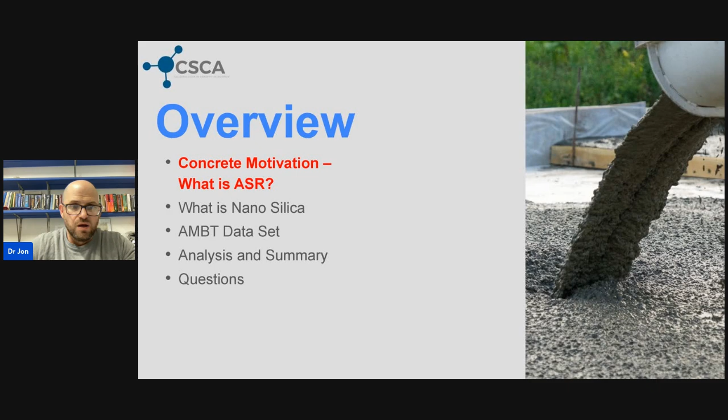For my nanosilica enthusiasts, or for my ASR enthusiasts, please forgive me as I take some artistic liberty with explaining this in a very short, concise set of time here in slides.

Our concrete national infrastructure is made up of over 600,000 concrete bridges. This establishes a $48 billion a year industry. Of that, $8.3 billion is put back into maintenance associated with physical and chemical attack. Now, I'm not saying that concrete is broken, but we do need to figure out a way to enhance the durability.

If you're of the mindset that, well Jon, that's fine, but we're talking about concrete that's 20, 30 years old, who cares, we've changed mix designs - you're not wrong. We need to address the problems from concrete 20 years ago, concrete from 2005, which is not that long ago, especially since concrete bridges at that point were designed for 100 years. As it turns out, there are many bridges throughout the Western US, Midwest US, that are at 25 years old out of 100 years.

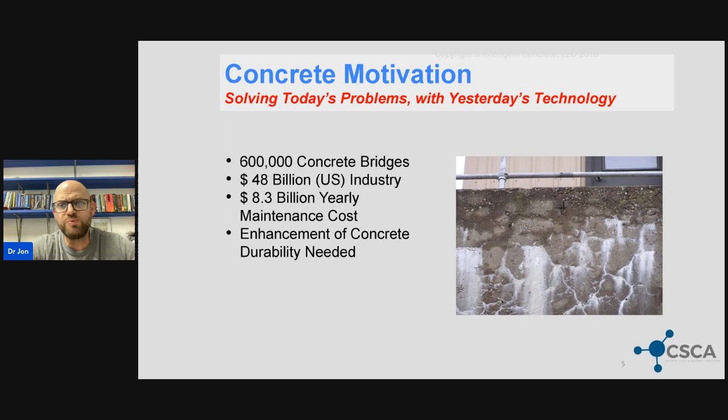And they look like this - a water reclamation project here that has some beautiful map cracking and just some gel oozing out of it. This isn't a surprise to us. We should have seen this coming as concrete producers, as contractors, as engineers. We don't even have to be that involved in the industry - I work for a living and I'm not in the academic arena, so I don't go to these associations. That isn't an excuse anymore with the World Wide Web.

Just Intelligent Concrete and their employees alone, we have somewhere around 100,000 folks who get to see what we share every day for the last few years. And part of that is the herpes of concrete, or alkali silica reaction.

Again, we've seen the changes: the use of higher alkali cements in the late 90s through the early 2000s, all the way to the 2010s. Then through the 2010s and maybe the early 2020s, the use of lower alkali or lower quality reactive aggregates. And the unfortunate reality, it's been buttoned up with ineffective pozzolans. Now, some would say that since we're dealing with these problems, there are cements and low carbon concrete methods introducing a cacophony of errors that we have yet to deal with. I wouldn't argue that.

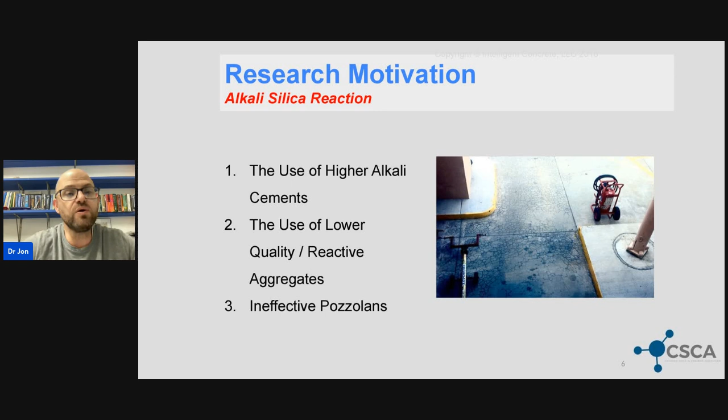But let's get into ASR.

ASR - somebody who deals with this on a very high level, ASTM wise, once said that ASR is not and will never be the primary failure mechanism for a concrete structure. Remember, he made me take it out of my paper. It was funny enough, three months later, he used the same kind of statement: that ASR, for the first time ever, is that primary failure mechanism.

So if you've never seen ASR, what we've got here is a reactive aggregate, and normally that aggregate has a tetrahedral form of silica that is susceptible to a breakdown because of a change in pH at the interfacial zone between the hydrated cement paste and that reactive aggregate.

Now, within that hydrated cement paste, there is a wide variety of salts within water, and we call that a pore water solution. It happens that the alkalis within that pore water solution - sodium, potassium, as well as calcium - break down the reactive silica and redistribute, reorganizing it from monomers to dimers and oligomers in a polymer into this hydrogel that has an expansive nature at that interfacial zone between the hydrated cement matrix and our aggregate interface.

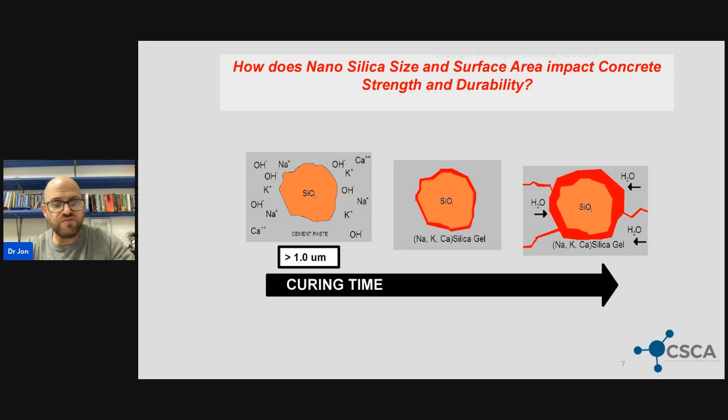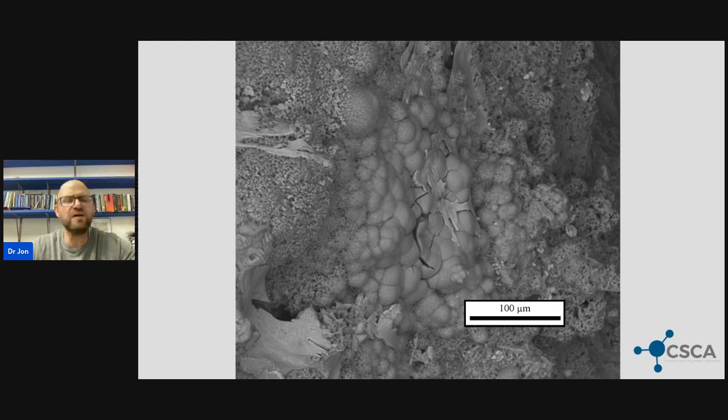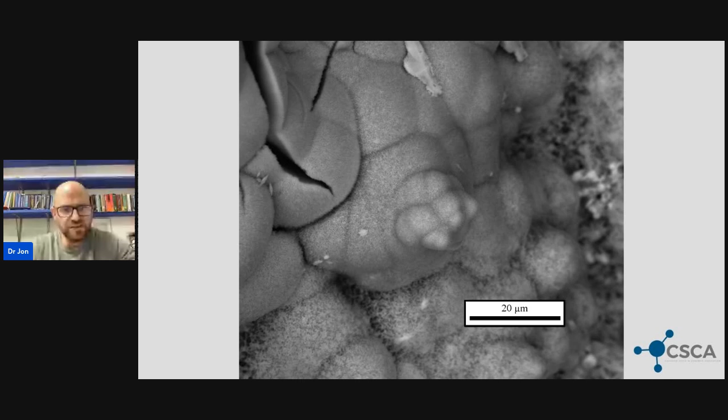Uh-oh, I'm going to kill my camera. We're having video problems here. Hold on, let me see.

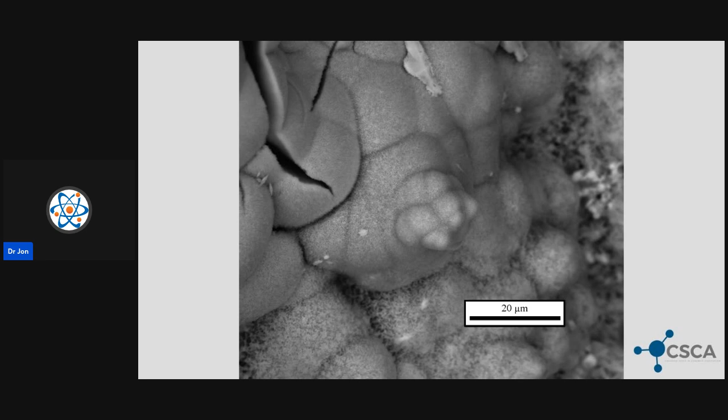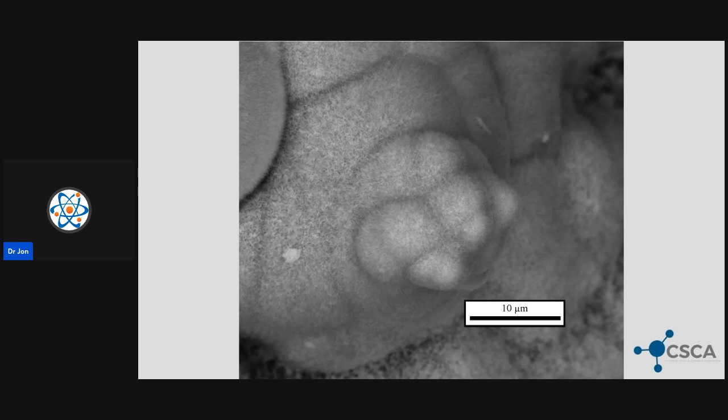Okay, so this is a higher magnification of that ASR gel rosette, and you can see I'm trying to focus on those little nodules there at the center. As I get closer, and hopefully the image isn't lagging, you can almost see some of the individual fibril morphologies - these wispy, needle-like structures that are interlocking.

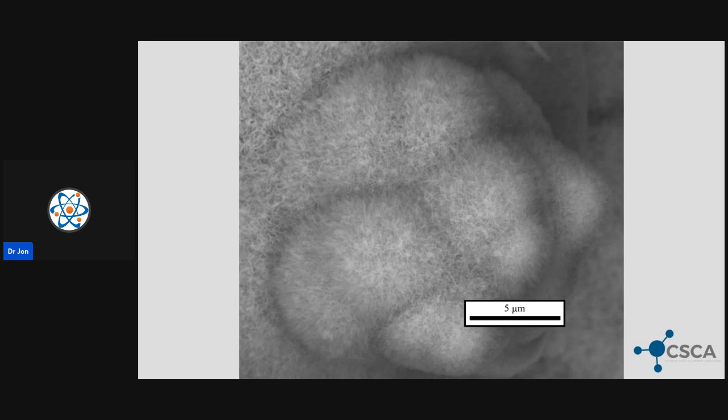We're going to get a little bit closer, but this is the mechanism behind the ASR gel drawing in more water, having the ability not only to survive in that hydrogel-like state but also thrive, going from a mature to a new or immature gel state, which again is often contained within a shell that is then confined, creating more stress. I think that's the highest zoom I have on this. It's just so gosh darn pretty to look at.

And if you've never read her paper - Kim Kurtis, back in 1996, and I brag about this paper way too much - she did a paper on soft X-ray gel spectroscopy, microscopy... I can't remember the last word she used, but basically what she was looking at is this fibril-like morphology of the ASR gel rosette.

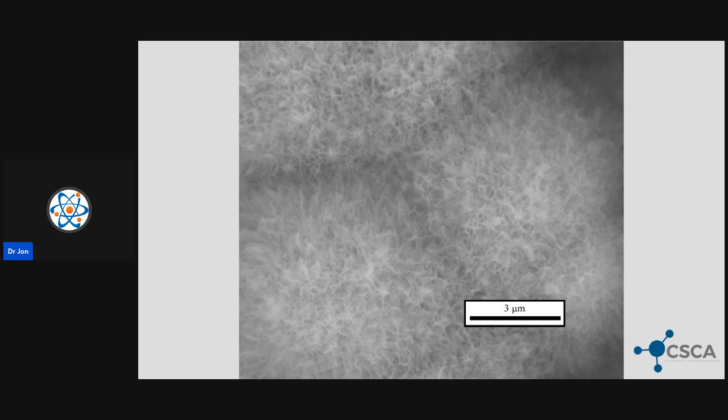And why that's important is because we have these needle-like fibers or fibrils crossing over each other, creating pores with extremely large and then small diameters all the way through it. What that does is create a capillary suction that draws in not only the pore water solution but the salts, which will induce more expansion.

Now again, I want to remind everybody, this wasn't a surprise to us that this ASR issue was not only going to be an ongoing problem, but it was going to get worse. Those three things I brought up earlier - those weren't my words, and I'm not trying to plagiarize. Here's a great recommendation for you to read.

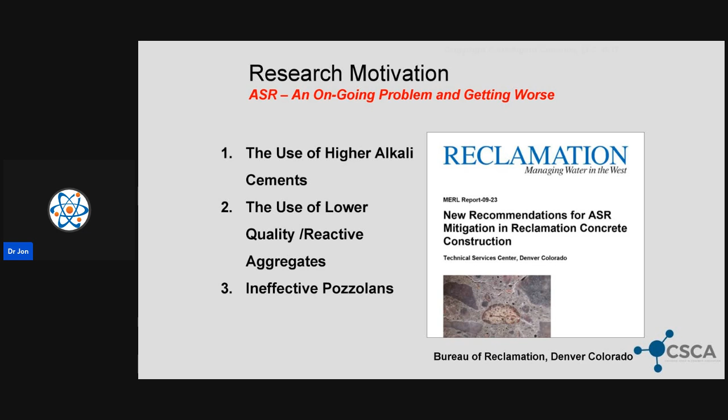This is by Katie Bartojay, Kurt Von Fay, and a couple other folks at the Bureau of Reclamation in Denver, at the Denver Federal Center. They came up with a great paper on new recommendations for ASR mitigation, and they cite the three reasons why ASR was going to get so much worse. It's literally in the front of the document - you don't have to go sixty pages to the conclusion to find out what's going on. So we knew about this.

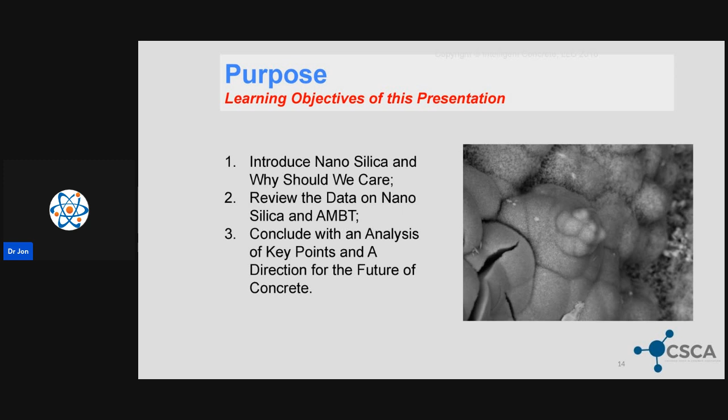Now that I've created the doom and gloom, the objectives of this next part: I want to introduce what nanosilica is. I want to go into why we should care about using nanosilica as a tool in our ASR mitigation box. And then from there, we're going to review the data, not only the AMBT, but also this ASR gel pat test that we did. And then we're going to wrap it up with a concise summary, analyzing the key points and the direction for the future. And then, of course, we're going to open up for any questions.

Okay, let me see. Do we have any comments, questions? Did you see any, Whit? No, I don't think so. All right, come on, y'all. Start coming up with good questions. I got a bunch of T-shirts over here. I don't have a bunch of T-shirts. We have a few T-shirts.

Okay, so what is nanosilica? I think I might have uploaded the wrong presentation. We're going to find out here in a second. Let me see. Yeah, we'll see here in a second if I have to change over. Man, oh, shut it. Yeah, hopefully this is not the wrong one.

Okay, so nanosilica is a liquid dispersion of nanosilica-sized particles, not affected by gravity, clear to milky appearance. The specific surface area is anywhere between 30 to 2,700 meters squared per gram. Solid content can be anywhere between 15 and 50%, and your pH has a maximum of 10.7.

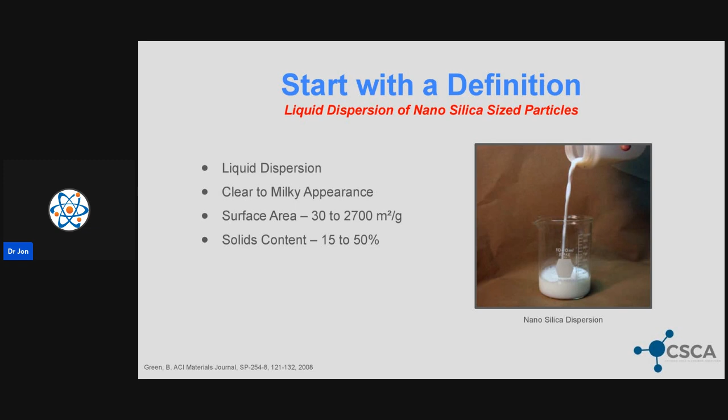Now, thank you, Brian Green and his crew from their paper on ultrafine amorphous colloidal silica for a rock matching grout. And this is a colloidal silica or nanosilica dispersion. And just a quick concrete hack for you. The larger the particle, the more opaque or milk-like the colloidal silica dispersion. The smaller the particle, the more it looks like water or water with a blue and greenish tint to it.

Now, when we put this technology under a microscope, I like to set up these references to give you all an idea of what we're dealing with here. Just to give you a reference, a human hair, obviously not on my head, is around 100,000 nanometers in diameter. For my concrete folk, left-hand side, our fly ash that we traditionally use, that poor man's water reducer, pozzolanic reaction, when we put it under an electron microscope, we'll see it somewhere between 1 micrometer and 100 micrometers. Here we see it around 10 to 20 micrometers in diameter.

Using a similar, not the same, electron microscope, when we look at nanosilica, it's around 10 to 20 nanometers, effectively 1,000 times smaller than our fly ash. And because it's smaller, we're going to have some different positive benefits that we can take advantage of, not only for other value-added performance like abrasion resistance, permeability, but also alkali silica reactivity.

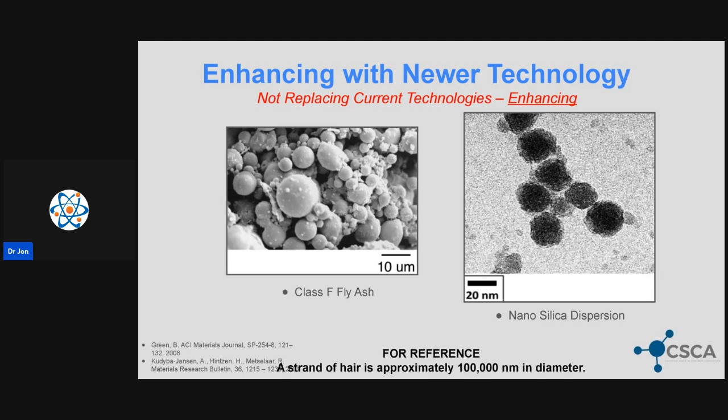Now, what's so special about nanosilica? First of all, with nanosilica we have this free silica surface area for pozzolanic reaction. I often refer to the team, Land and Stephan, who wrote a paper back in 2012 that talks about this instantaneous pozzolanic reaction that they refer to as the calcium silicate hydrate seeding effect.

Now, because you have that accelerated consumption of calcium hydroxide to develop more of that strength-bearing structure of concrete, that calcium silicate hydrate, you have a higher degree of cement dissolution. We call that accelerated cement dissolution. Two great papers, Bjornstrom et al., back in 2003 and 2004. What that basically means is we're getting a higher dissolution rate. We're getting more bang out of one cement particle compared to what we would without that nanosilica technology.

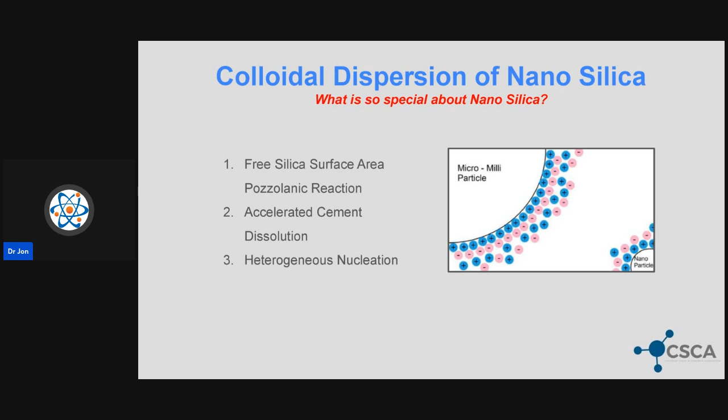And the last piece, what makes nanosilica different from other particles in the micron realm, is something called heterogeneous nucleation, which is a very fancy way of saying, because we have a very small particle, it has a very small force field on it, and therefore other things will want to grow on that particle because of said smaller force field or electrical double layer. And I illustrate that here with my micrometer-sized particle versus the nanometer-sized particle on the right. Those change in force field.

Okay, so let me just check the, what's it called? Let me see. I really hope I didn't screw that up. Oh no, I think I did, Whitney. Everybody, I might have to change slides here in a second. Maybe not. We'll see. If not, it'll be a quick change. Okay, comments. What comments do we have?

Does nanosilica increase abrasion resistance in concrete? Yes, Sri Harsha. Let me show the questions. Yes, we've been seeing that for a long time now. But again, if you do a quick Google Scholar search, or if you're part of the ASTM, I think it's C09.24, our committee to make an ASTM for colloidal silica in concrete, then you'll see some of the different references that go back to abrasion resistance.

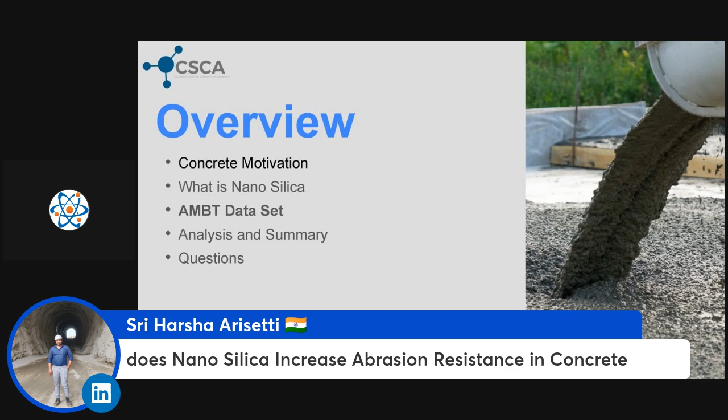Are there any health issues for inhaling silica dust? Yes, but Yosef, we're not talking about silica dust here. That's a topic for a different conversation. The Silica Fume Association does a very good job of talking about silica dust, but this is not dust. This is colloidal silica or nanosilica sized particles in a liquid dispersion. And when it dries, it agglomerates into big chunks that don't plume into the air.

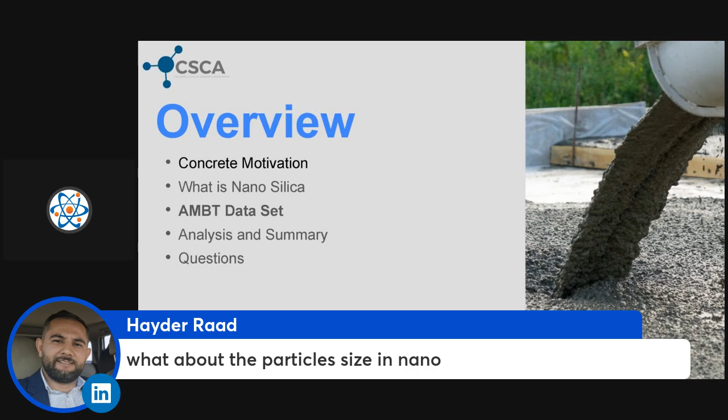And that's Yosef's question. And then, what about the particle size in nanosilica? We're going to get to that here in a little bit, Hayder.

Ranit: I did trials with nanosilica 0.3% with 2 different cementitious materials but did not get significant strength gain. I've also observed shrinkage cracks after hardening. It sounds like, Ranit, you need to use a different type of nanosilica. If you didn't see any type of strength gain, especially early strength gain, you might have been using too small of a nanoparticle size, like a 3 to 5 nanometer, especially if you have observed shrinkage cracks after hardening.

We can get into what better types of nanosilica there are out there for it, but basically you want to go for a larger particle size, ultimately to control that hydration. But I would need a lot more information, Ranit.

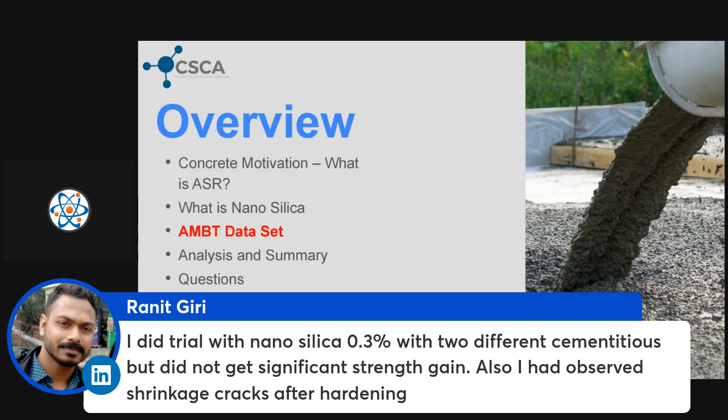All right, so mortar bar design. Oh gosh, is that number right? I think this is the wrong presentation. So if I screwed that number up on the 20%, I apologize. It looks like I screwed that up. Sorry. It's supposed to be the opposite. It's supposed to be 990 on aggregate and 440 on cement, and I switched those two. I apologize profusely. That was not intentional, but you get the idea.

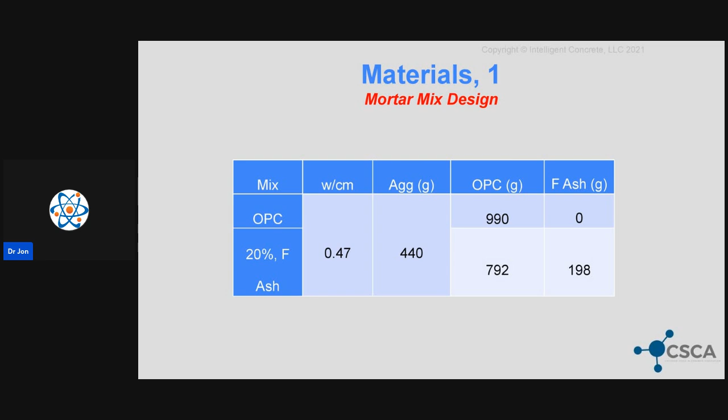Here's our colloidal silica packages that we used. We used 3 different types. They were narrow distributions, 3 to 5 nanometer, 9 to 11, and 45 to 47, to give us those 3 different specific surface areas.

Is it cutting off the bottom? I don't think so. Can you see dose 4? I cannot see. Mine is showing the overview slide right now. I don't know why. Let me refresh. Hold on, folks. Okay, I'll keep going, assuming that we're doing all right here. Yeah, I can't see those. You know what? Why don't you shut yours down? Maybe you're drawing on some of the internet for this.

So what we've got here is 3 discrete or narrow distributions, and I used them at 4 different dosages, where the first dosage represented an equivalent amount of silica that would be brought by 20% class F fly ash. Then we increased it by 1 order of magnitude, to 200% fly ash, and then 2,000, and then 4,000% equivalent. We couldn't replicate that using class F fly ash in our mixes, so we stuck with that 20%, but we used colloidal silica with the same specific surface area of reactive silica as the class F fly ash, and then those increased dosages.

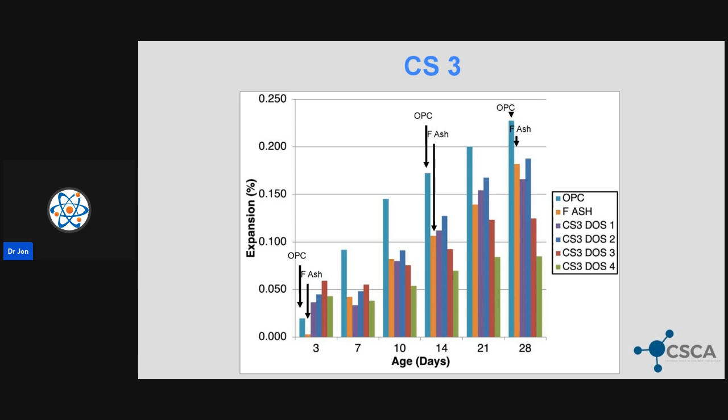Okay, you might have been using too much. You might not have been using enough. You might have been using a cement that doesn't work well with nano silica or colloidal silica, and it could agglomerate as soon as you distributed it into the mix. You might not have mixed it fast enough. There might have been a mid-range water reducer in your mix, and so on and so forth. So just because it didn't work once doesn't mean it'll never work. Just means you need a better combination of colloidal silica to your binder and admixture matrix.

Okay, so let's get back to how does the ASR work, and how does the nanosilica size and surface area impact it? And like I said, we have these much smaller particles. Every single dispersion that we're using is very discrete. So we know that there are certain mechanisms that are happening with the smallest ones that are not happening with the largest ones, and vice versa.

And as it turns out, with the smallest particles, and you can go back to a lot of the research, not only the research that we've done, but a lot of folks from other universities from all over the world that show that those particles that are really, really small have a tendency of burning up faster and getting lost in the hydrated product. And we have to question whether or not it's nanosilica anymore, or is it now chemically incorporated into the calcium silicate hydrate network. Now, what's great about that stuff is it has an immediate interaction with the pore water solution, doing something that would otherwise cause ASR expansion.

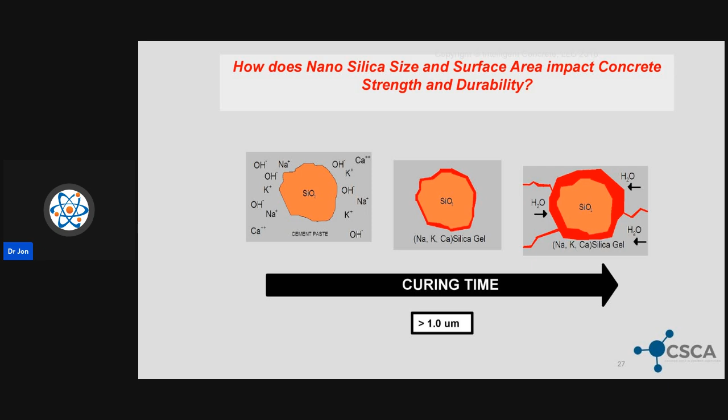And there's some wonderful papers that I've been reading on the role of portlandite or calcium hydroxide, the need for that for the ASR gel expansion to really kick off. Now, with our larger particles, they might not kick off that pozzolanic reaction as quickly, but what we found with those larger particles, 9 to 11, 45 to 47, even up to the 100 nanometer, is that we're creating a hydrogel that, even though it's not chemically incorporating into a calcium silicate hydrate network, it's binding those alkalis that would then normally contribute to the ASR gel mechanisms that we talked about earlier and referred to in this image. Okay.

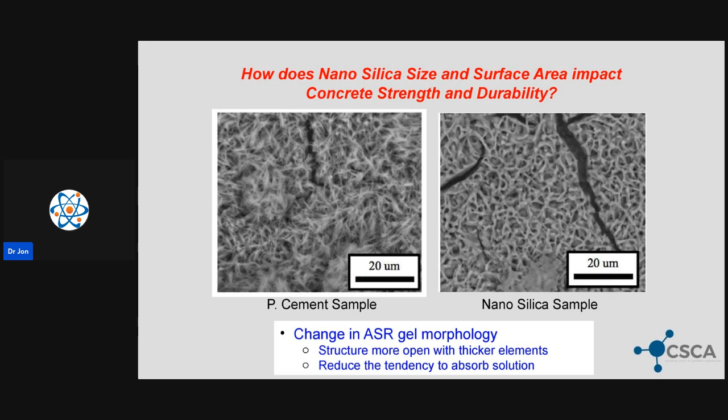There's almost none present. When we look deeper into the ASR gel morphology, the rosettes, we see not just a change in the presence or amount of ASR gel, but a change in structure. Those wispy-like fibers become thicker elements, changing the diameter of those pores and reducing the tendency for the ASR gel to absorb solution.

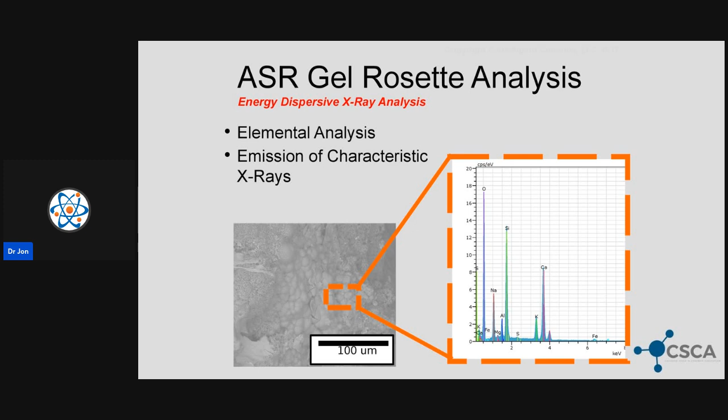Not only did we look at the topography or structure of the gel, but we also used elemental or mass species analysis in our scanning electron microscope to look at what the gels were made up of and if there was a change. What we found is an increase in silica content and a reduction in calcium content, ultimately creating an environment not conducive for ASR gel polymerization.

We also showed that there was a major change in sodium and potassium in these gels.

The reason I referred to the calcium hydroxide, or Portlandite, is from this paper by Xiaoqiang Hou, Leslie Struble, and James Kirkpatrick on the formation of ASR gel and the roles of calcium silicate hydrate and Portlandite. It references one of Michael Thomas's papers, stating that in the absence of calcium hydroxide, they didn't see ASR gel polymerization kick off. So with the nanosilica, not only are we consuming more of that calcium hydroxide, that Portlandite, but we also see a reduction of that in our gels.

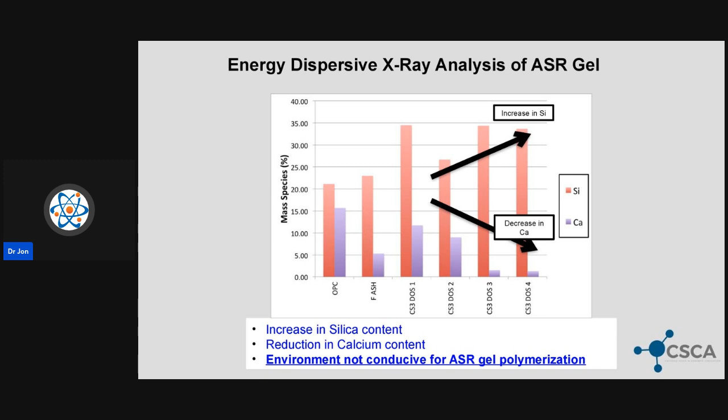And of course, that increase in silica is breaking the pessimum, oversaturating our ASR gel with silica, so we don't see the thriving of that ASR.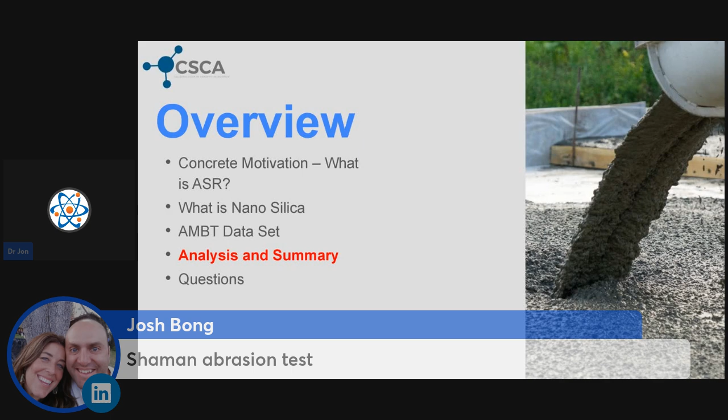Okay, let me check out. Holy moly guacamole, we got questions. Yes, the Chapman abrasion, Josh. That is correct, Chapman abrasion. Did I say Chaplin? Yeah, Chapman. Okay, Chapman. I like the Shaman abrasion test too, I just never seen that before. It sounds cool.

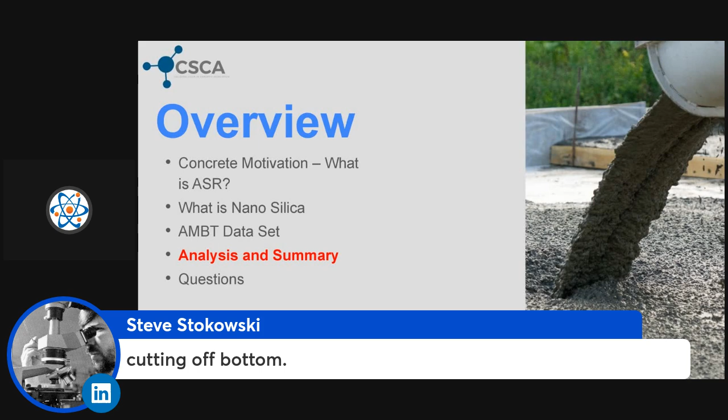Okay, hopefully I can get back to this slide. And then, no. Sorry, I don't know what no means. Cutting off the bottom, I know Steve. I know, I'm sorry, we'll figure that out.

Does the nanotechnology add any positive attributes with type 1L cement's difficulty during placement? There are problems with type 1L cement. We've been seeing some great value-added performance when it comes to using type 1L cement, and normally that's short-term benefits. There are some long-term effects too, but as it turns out, the type 1L cements are really causing issues that's a topic for another discussion.

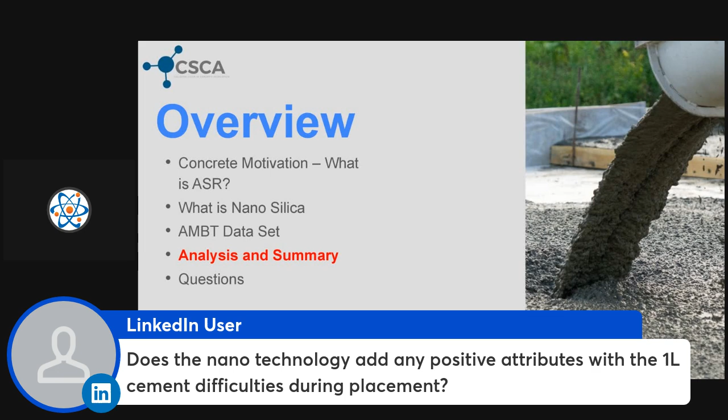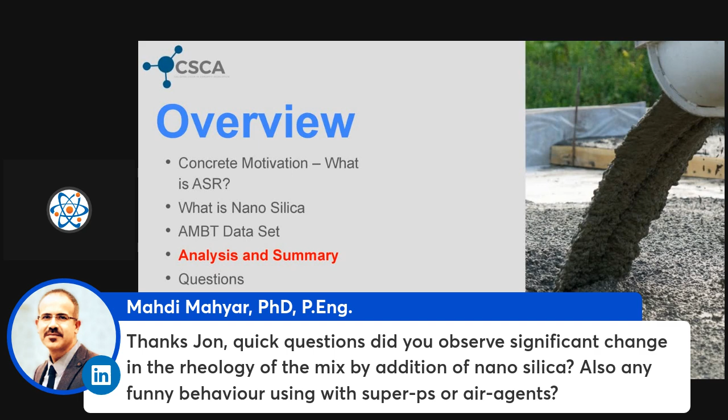Quick question, do you observe significant change in the rheology? Yeah, absolutely, Mahdi. We did an entire YouTube video on using nanosilica to bring back a mix from segregation, using different nanosilica sizes at different dosages and how it changes the rheology of the mix. There's also great work done by Konstantin Sobolev on the impact of nanosilica on high range water reducer efficiency. If you look at our article published in 2015 on colloidal silica admixture, it shows how we increased slump evolution while reducing our super P dosage by over 50%. And air entrainment, the great thing about all nanoparticles, not just nanosilica, is they stabilize everything around them, including air as well as water for internal curing.

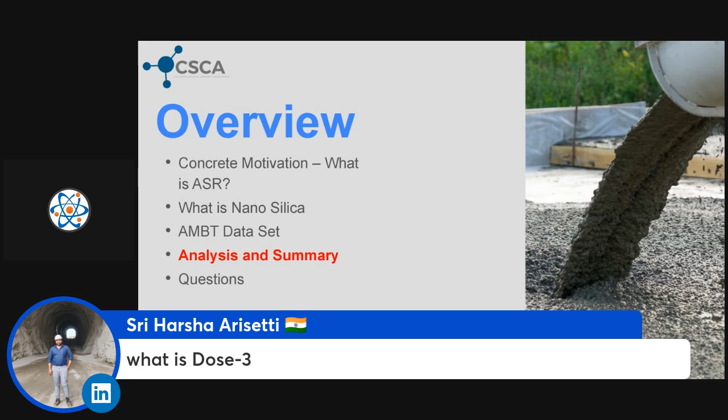Edgar, no problem sir, let me know if you have any questions. Dose number 3, standby. There it is. Dose number 3 for CS3 would be around 5.46% of total cementitious, and that's dry nanosilica.

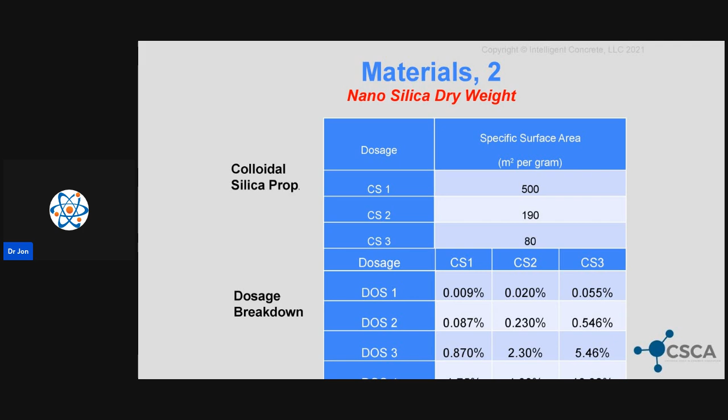Okay, Chapman abrasion, we already got that. Squared, thank you, Josh.

Please send me the name and specs of the microscopes you use for those.

Yes, I think I can. I have those raw images. Better yet, if you go over to my PhD, it goes into that in raw detail, Matt, into detail ad nauseum. And that is full free, sir, so please be inclined to go check it out. I'm going to see if I can find it here, which one we use.

I don't want to waste too much time doing that. Whitney's going to yell at me here in a second to get back to it. I tell you, if you go check out my PhD, again, you're not paying for it. It is for free, but it goes into everything that I did ad nauseum, and it gives you all the information to recreate it. Okay, here it is, man.

Matthew, it is an FEI Nova NanoSEM 630, capable of high resolution imaging on non-conductive materials. And I go through the polishing steps of ethylene glycol and ethanol and the grits that I use. But yeah, please check that out, man.

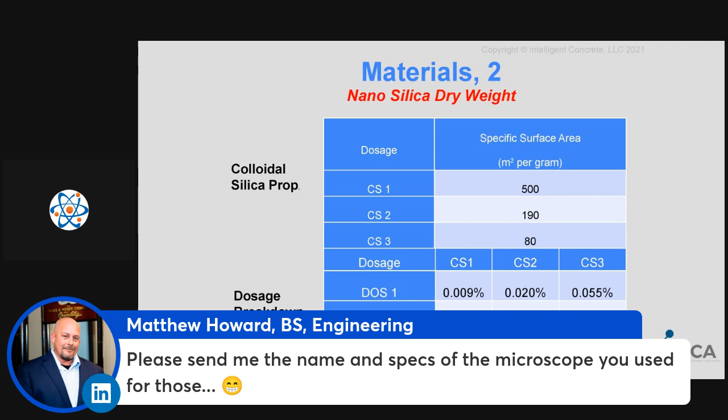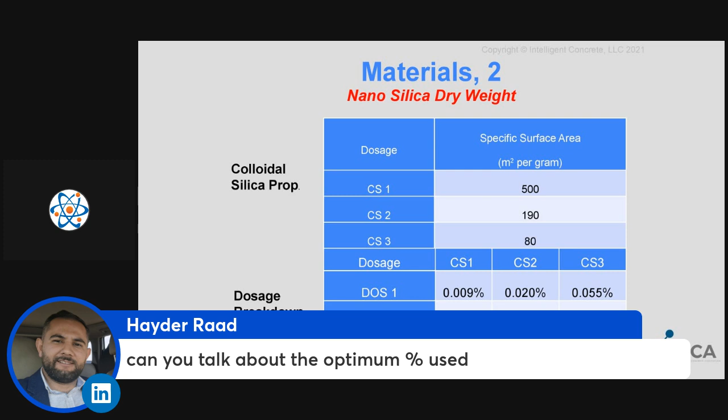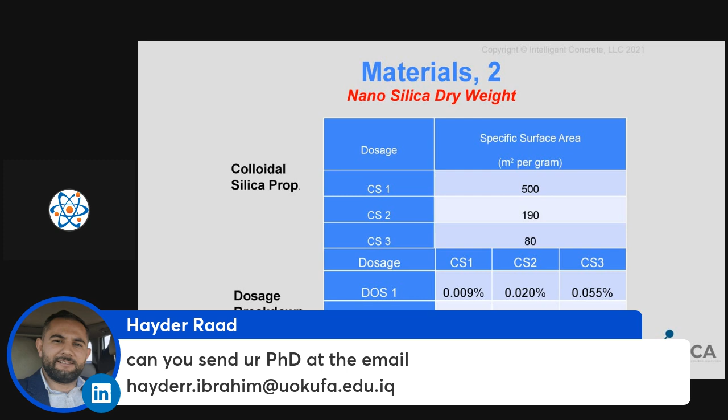Yes, I will try and remember to do that, sir. I'd ask Mallory and Whitney to take some notes. Hayder's just asking me to send. You know what? I'll include the link to it in this. So Hayder, if you just come back to this, I'll include the link in this LinkedIn Live thing. Why, thank you, Matthew.

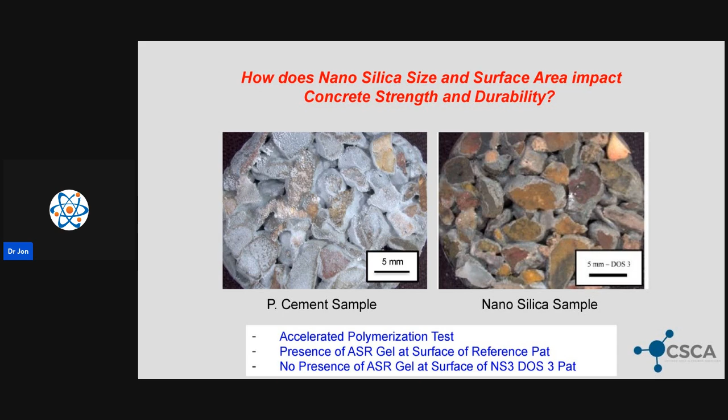Analysis and summary. So this goes back to Hayder's question: is there a perfect particle size to use for one specific use or for all concrete mixes? And the answer is no. That's something that separates the manufacturers, whether you're using mixed in, topically applied, or injected. There are so many different types of particles, nanosilica particle uses and distributions, and we really haven't even gone outside of the ASR discussion. There's steel corrosion, there's calcium oxychloride formation. There's a lot that you would need to know for ASR.

I mean, if we even narrowed it down to that, it depends. Are you using straight cement? Is it a Type 1L? Is it a Type 1-2? Are you combining a silica fume, slag, class F fly ash, and are you using mid-ranges or normals or polycarboxylates? There's a lot of questions that we could ask before we point you. And when I say we, I'm talking about the royal term of all the manufacturers and distributors out there to help you get the right particle for the right use or the right distribution for the right use, especially when it comes to ASR.

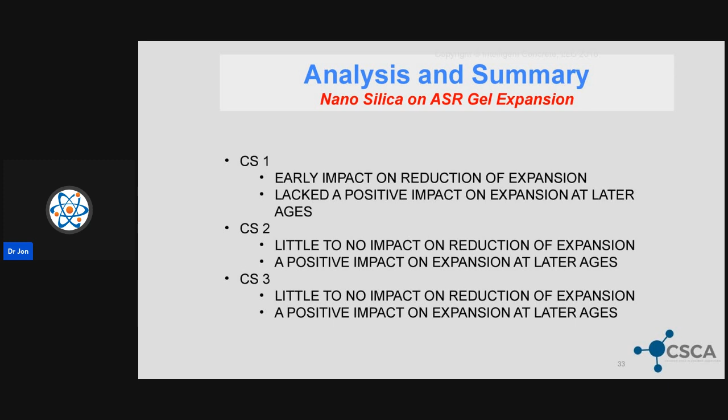So we saw the smallest particle size had an earlier impact on the reduction of expansion, but it lacked a positive impact on expansion at later ages, meaning the growth over time. With CS2, there was little to no impact on reduction of expansion, but there was immediate expansion. Over the later ages, obviously there was more positive effect as we added more. The same thing can be said for that largest particle distribution, the 45 to 47 nanometer size.

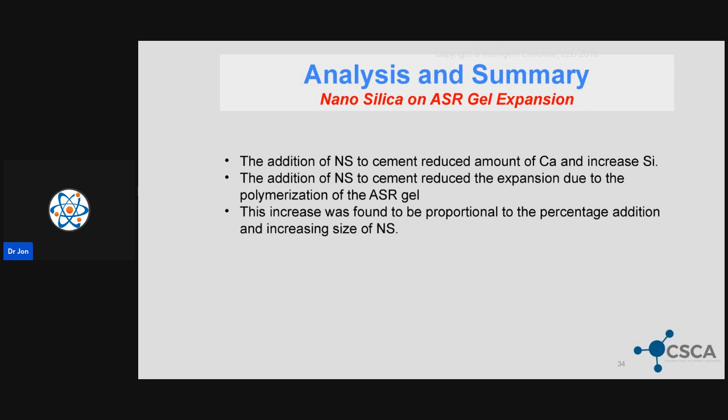The bullet points and key takeaways from this: the addition of nanosilica to cement reduced the amount of calcium and increased the amount of silica. The addition of nanosilica to cement reduced the expansion due to the polymerization change, the morphology that we looked at of the ASR gel. And the increase was found to be proportional to the percent addition and increasing the size of nanosilica. So the more that you added and the larger it got, the better the resiliency to ASR gel expansion.

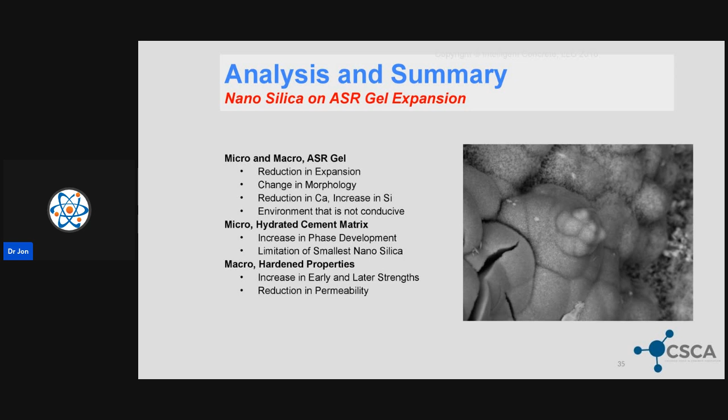From our micro and macro analysis, we noticed the reduction in expansion, the change in morphology, and that change in chemistry creating an environment that wasn't conducive to ASR. What we found later in the research, which you'll get into in my PhD, is we changed the phases of calcium silicate hydrate, specifically the silicon tetrahedron. This implies that the overabundance of silica not only pushed past the point where ASR wanted to thrive and survive, but also created a stronger matrix that'll be more resilient to expansion when it does occur.

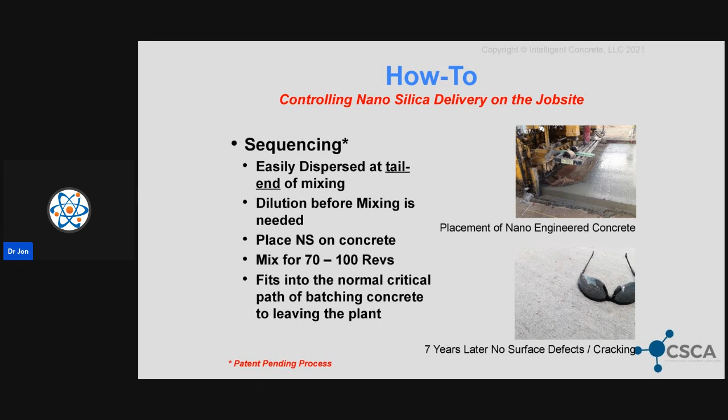Okay, so now what does this mean? What are our goals? We've gone over everything from talking to folks in the industry about how to use nanosilica, both as an admixture and as a topical agent. What we know is the research has been done ad nauseam.

We've got a wide variety of ongoing ASR problems. As it turns out, Class F fly ash died years ago—it's not the same Class F fly ash we had in the late 90s and early 2000s. We have a limitation on lithiums that we used to use to treat ASR, and as it turns out, there's a limitation on all the mature technologies. Even silica fumes are going to steel production and other industries. And on top of that, the quality of our aggregate is diminishing. I don't care where you're at—whether it's New Jersey going from river rock in the 40s and 50s to crushed blue rock now, or Ohio, Colorado—we're just using more reactive aggregate that increases the sensitivity to this ASR gel mechanism, or tendency.

We've been using nanosilica in a colloidal suspension for decades. The commercial success has been proven through companies, through DOTs, through federal agencies all over the world.

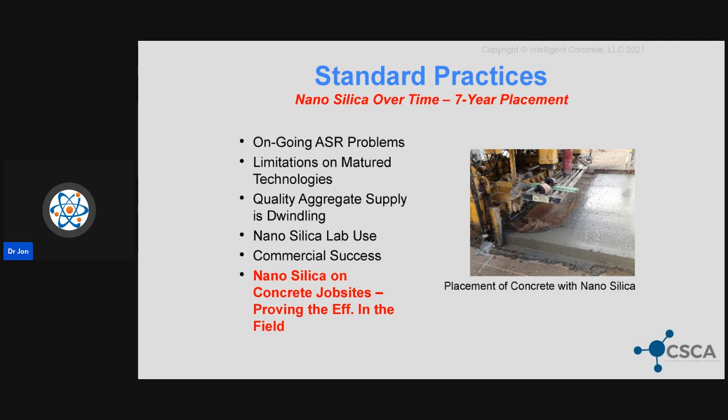Now the idea is we've got to educate the industry. And if you're one of those naysayers who says there's no way, I'd love to try and prove you wrong.

Before I open up the floor for any questions, I want to show you how real and nasty this problem can get. I think it was Hader who asked if we have other books. The ABCs of ASR does a great job of showing you all the different things associated with ASR, including ultimate failure. One of the things I love looking at is not only the failure, but how the failure is repetitive—not only the Isle of Man cracks, the 120 degrees that go off of each of the three legs, but also the gel that oozes out of the concrete when failure ensues, both at the beginning of the end of its life and at the very end of its life.

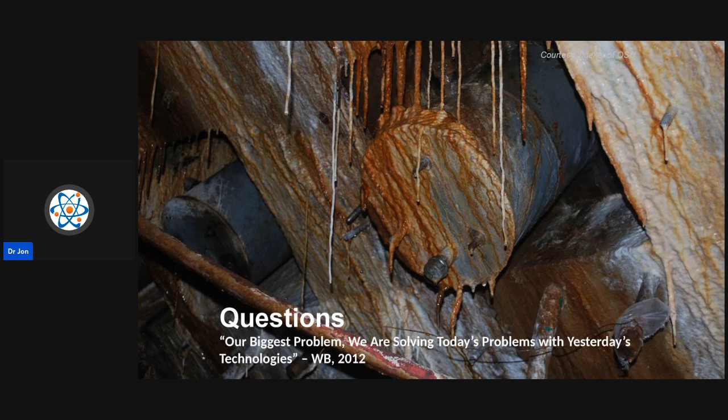This is a real structure being used on the Western US. What you see there is not a horror movie, but ASR formation, where the gel is being squeezed out of the concrete along with iron oxide from steel corrosion and failure.

Oh, can you provide your contact? Heck yeah, I can provide my contact. You kidding me, buddy? I would love to. Let me do that right now. Maybe I should do that in the beginning. Oh wait, let me—I don't. Okay, here, that's me, Jon at intelligent-concrete. Ooh, that's not how you spell concrete.com. That's not how you spell .com.

Oh, it's limited to 50 banners. Okay, add banner—boom, that was it? That's the only question?